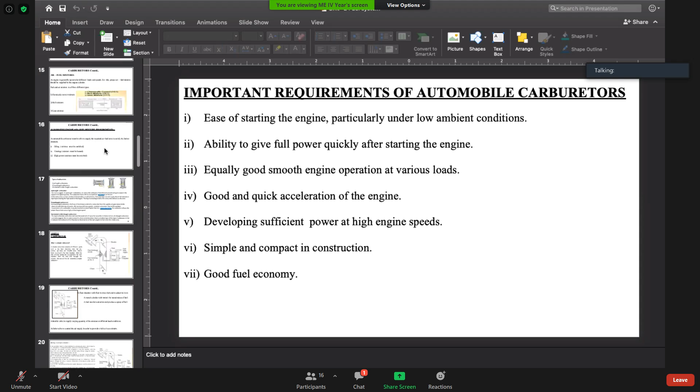Yes, so this is your simple carburetor. Now, who is going to explain it? Anyone of the students? Raise your hands in the Zoom app, those who are able to explain it, or else I will call the name. We have now 17 participants. Fast recap, whatever is in your mind, in your memory regarding the simple carburetor.

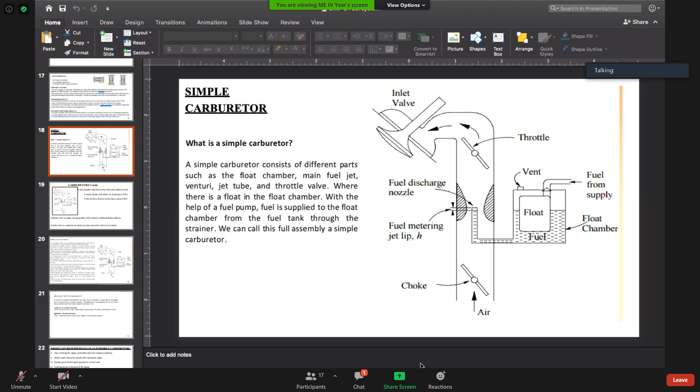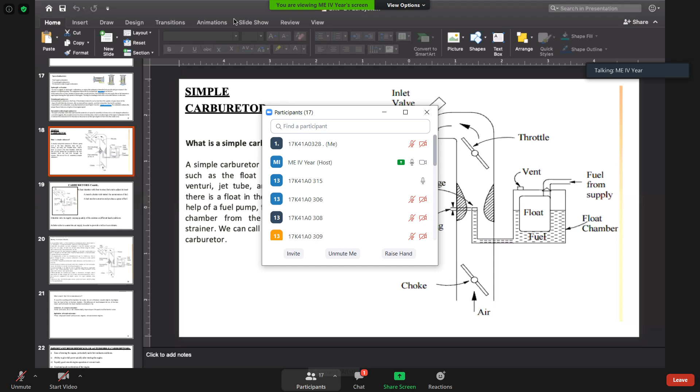Sir, yes, a simple carburetor has a float chamber, and the fuel is sucked into the inlet port by the air entering. It has a fuel metering jet which will stop the overflow of fuel into the chamber, sir. Here at this venturi, the velocity increases and pressure decreases. Due to the decrease in pressure, the fuel is sucked into the inlet, sir.

Anything else? That's all, okay, very good. I really appreciate your attempt to explain the working of this simple carburetor. Anybody else?

384, are you there, 384? Yes, sir, I am Rahul. Yes, Rahul, explain the working of simple carburetor. Yesterday you were there in the class? Yes, sir, but due to some network issue, I am unable to hear clearly yesterday's class, sir.

So that's why I'm asking you to find a better option for your network, because this entire semester will be online only. And many students are not taking these classes seriously, that's why I am asking this.

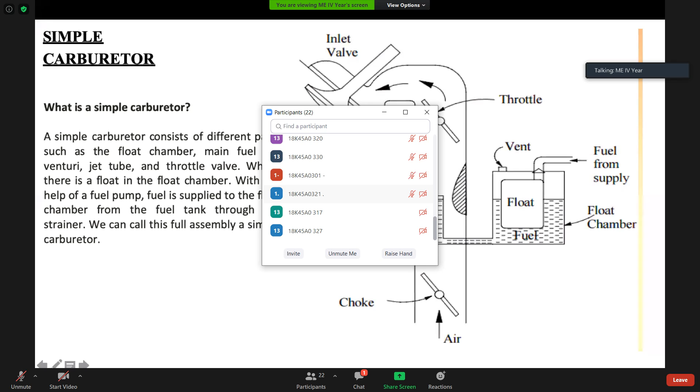I'll call a few more roll numbers. 352, Nisar Ahmed, where are you? Are you here? 352 is not present today.

Okay, who is 392? Are you there? Yes. Who is this 392? What is your name? Rajab Ali. Yes, very good. You explain the working of the simple carburetor.

See yourself, yesterday I took 1 hour to explain the working of this simple carburetor. I'm asking you to just say for 1 or 2 minutes, whatever is there in your memory, what I taught you in yesterday's class, from that 60-minute or 50-minute class. Whatever is in your memory, you tell me, Rajab Ali. 1 or 2 minutes.

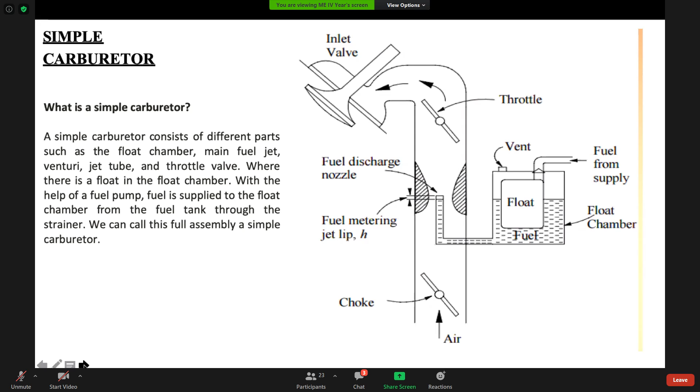So this is the working of your simple carburetor that we have seen yesterday. We have done a fast recap of what we discussed yesterday. Today we will see the Solex carburetor, and as I have told you in previous classes, this is very important for your examination point of view.

So what are the requirements of an automobile carburetor? First, ease of starting the engine, particularly under low ambient conditions. Ability to give full power quickly after starting the engine, good and smooth engine operation at various loading conditions, good and quick acceleration of the engine, develop sufficient power at high engine speed, simple and compact in construction, and good fuel economy. These are the important requirements of an automobile carburetor.

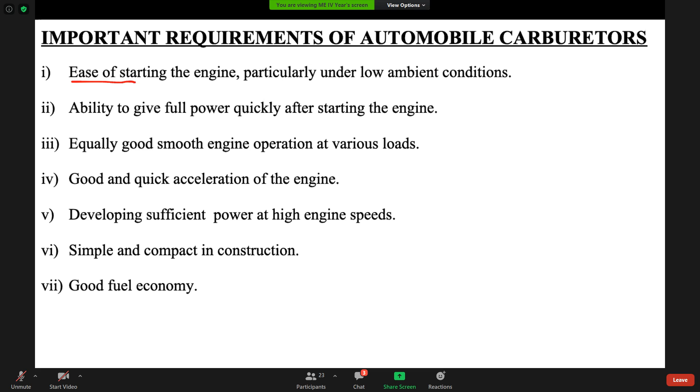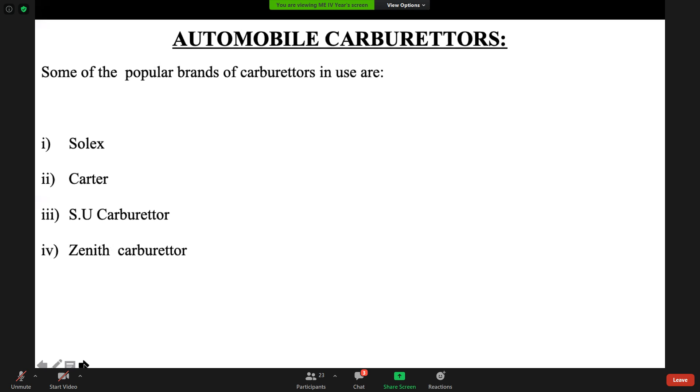So how that carburetor is working in starting condition, how it is working in idling condition. For this, there are different geometrical or functional arrangements in the carburetor. We will see all of them one by one: how it is starting, how it is idling, how it is working in low speed, how it is working during acceleration.

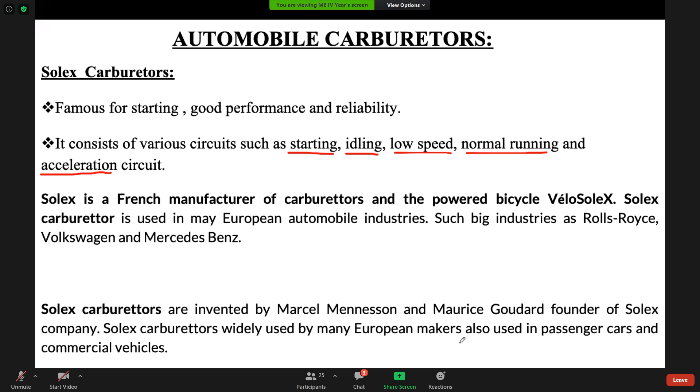A brief history of this Solex carburetor. Solex is a French manufacturer of carburetors and the powered bicycle Velo Solex. Solex carburetor is used in many European automobile industries, big industries such as Rolls-Royce, Volkswagen, Mercedes-Benz. This carburetor was invented by Marcel Mennesson and Maurice Goudard, the founders of the Solex carburetor and the company as well. It is widely used in many European makers and also used in passenger cars and commercial vehicles.

So this is the diagram of the Solex carburetor. You can see similar components as in our simple carburetor, with the addition of geometrical features to compensate for starting, idling in slow condition, normal running, and acceleration. Listen carefully, I'll start one by one. I will tell everything, how starting is occurring, how idling in slow condition this carburetor is working. You have to draw this diagram and explain it also.

See here on this side, this is the special arrangement in our Solex carburetor. I am marking it in red color. This is called the bi-starter circuit, which is helpful for starting. So I will mark all the circuits here.

The second is your idling and slow speed condition. This is your circuit for idling and slow speed, which I'm marking in blue color. This is your idling and slow condition circuit.

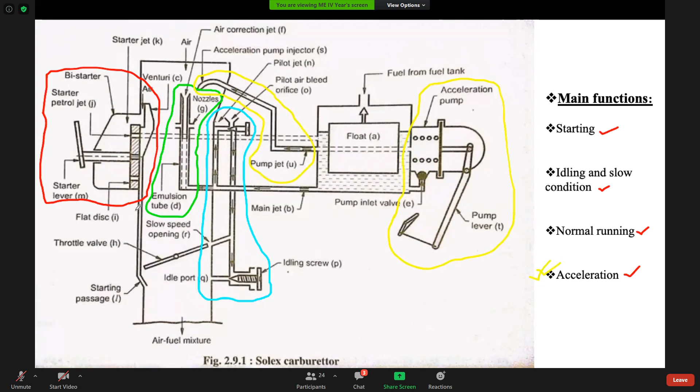In your examination they can ask you to explain the working of the Solex carburetor directly, or they can ask for any one of them, like explain the acceleration circuit, how it is attained in your Solex carburetor. In that situation, if one specific part is asked, you explain that one only. If it is not mentioned, then you have to explain all of them. This will be a 10-mark question. Now let's see one by one, starting with our starting circuit.

Again, some introduction part is written here, actually it should be before that diagram. Solex carburetor is a downdraft carburetor. This is an important question - in yesterday's class I told you about downdraft, updraft, and horizontal draft. So your Solex carburetor is a downdraft carburetor, used mostly in automobile engines.

As we already discussed, the main drawback of the simple carburetor is that it maintains air fuel ratio at only one throttle position. It does not modify or change the amount or proportion of fuel with the air mixture. The Solex carburetor can provide a rich mixture when the engine needs to start and supply a lean mixture when cruising, meaning traveling with smooth economical speed.

This carburetor has different fuel discharge circuits so that it can deliver different mixtures for different operating conditions, such as engine starting, idling, low speed operation, normal operation, and acceleration. Solex carburetors were used by many European makers, and under license of Mikuni in Asia until the mid-80s when fuel injection was widely adopted. Among European countries who used Solex carburetor were these companies, and in Japan also many companies used it in vehicles like Toyota, Mitsubishi, Suzuki, Nissan, and Yamaha.

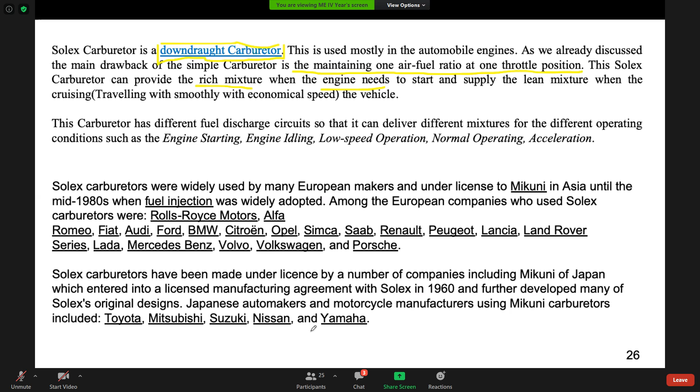Now we will come to the normal operating condition. So in normal operating condition, first focus on the diagram. I'll explain you, then we will see the text what I have written here.

Under normal working condition, here you can see one needle valve is there. The fuel from your fuel tank comes to this float chamber. Once it comes up to the defined level, this needle will close this supply point. After that, this is your main jet, I'm marking it in red color. Up to here, this is your main jet from where your fuel will enter into this emulsion tube.

Emulsion tube means here you have horizontal holes in the pipeline, in these pipes. Emulsion means it will mix up with the air. From where will the air come? Air will come from your top side.

And one air correction jet is also there. Some part of the air will come inside this also. You can see a venturi. Venturi means reduction in the cross section. There is a reduction in the cross section like this.

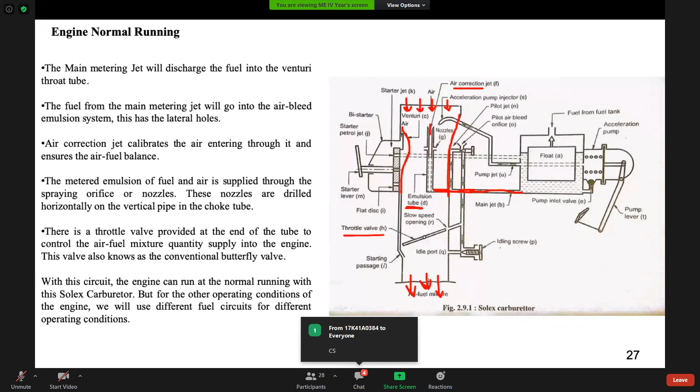Okay, this diagram is there in the next slide also. I will explain all the three circuits, then you complete the diagram.

Cold start and warming condition - we will see how the circuit is working during cold start. The presence of inline progressive starter is the main and unique feature of this Solex carburetor.

This line is talking about the bi-starter circuit. The starter valve, in the form of flat disc plate, has holes of different sizes. This is your plate, the flat disc. On this plate there are holes with different diameters. Here flat disc is mentioned, and this is your starter jet, located at this location.

This dashed line is connected to your fuel tank or float chamber, so the fuel is coming from this pipeline through the starter petrol jet, coming from this area. These holes in the flat disc connect the starter petrol jet and starter air jet, which opens below the throttle valve. The air will come inside this portion during starting, from this side, and fuel is coming from this side. It will be mixed in this area.

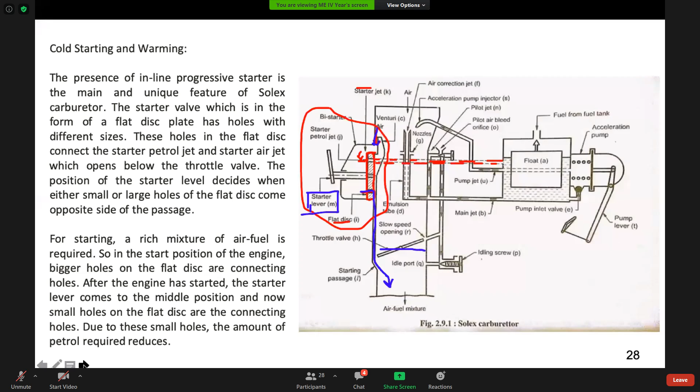Now see the idling position and the acceleration circuit. First we will see idling and slow speed operation. This is your idling circuit, this is your idle port. In idling condition, there is no load on the vehicle, but your engine is running, the vehicle is not moving. In that situation we need a rich mixture.

So how will we supply that? In idling and slow speed operation, the pilot jet takes from the main jet, and the throttle valve is in closed position. Here you can see one pilot jet. From this location, air will enter inside this pilot jet stream, or pilot air bleed, and the throttle is closed completely.

Therefore, suction is applied to the pilot jet. An idling screw is used for variation in delivery of petrol through this jet, allowing the mixture to become rich. Here you have the idling screw that can be adjusted for the required quality of the air fuel mixture.

In this situation, fuel from the main jet enters into the pilot jet. For petrol, let me use some other color - I'm using red. The fuel from the main jet enters into your pilot jet, and air will enter from the mainstream using this pilot jet, and it mixes at this location.